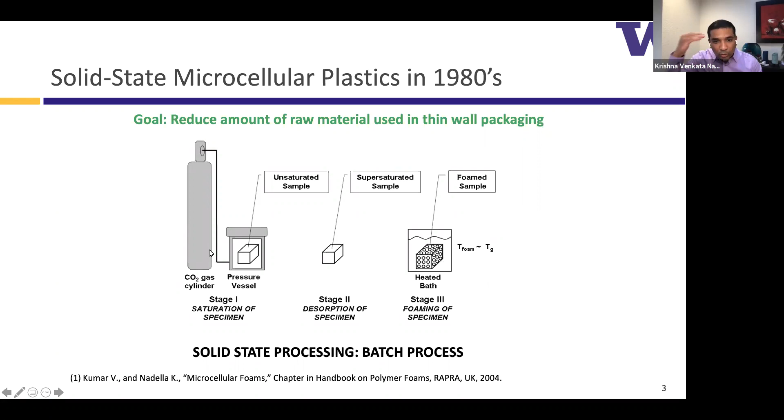We'll go through this again, what is important in this step. In the 1990s, when the consortium started in the mechanical engineering department, over 3-4 years all the focus was on the specific plastic called polyethylene terephthalate, PET. All of you know it—it is the plastic used for carbonated beverage bottles.

Soft drinks like Coke and Pepsi are sold in PET, the same plastic used for water bottles. Because it's ubiquitously used and is the world's most recycled plastic, there's a lot of interest in reducing the weight per unit area, or the density, in PET. It turns out the other big problem with PET is that traditional techniques to make bubbles by liquid state processing don't work like they do in polystyrene.

So there was a real need to develop a new technique to make bubbles reliably in PET. With that focus, Professor Kumar invented a technology called the semi-continuous process, in which a roll of extruded PET is interwoven with a roll of paper towel. You have a layer of PET, a layer of paper towel, and this interleaved roll is placed in a pressure vessel and injected with CO2 gas.

The process is essentially similar: you get some CO2 gas in, somewhere between 1 to 7% by weight, then you remove the roll and unwind it through a heated liquid bath followed by a chilled bath. The paper towel is recollected so you can reuse it again and again.

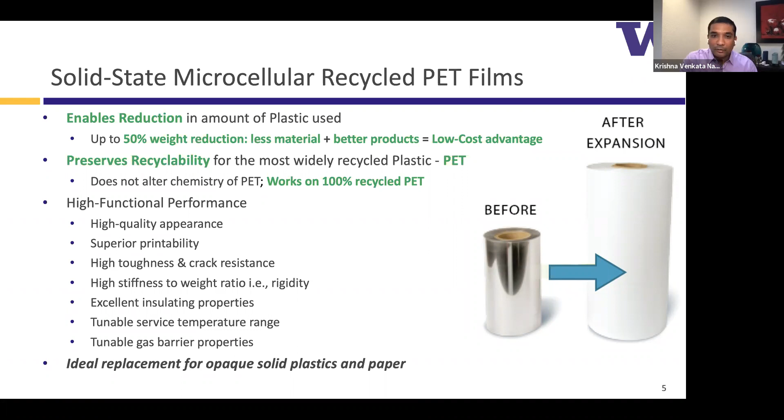Ideally, what we should be replacing is opaque solid plastics like high-impact polystyrene and paper, which, despite its image of being a very environmentally friendly material, in reality uses a lot of energy and releases a lot of greenhouse gases during its manufacture. So when you look at the key invisible attribute in this material, we have this optimized microstructure for individual applications.

So here is a good example of what a coffee cup looks like: a 25 micrometer skin followed by very small bubbles, followed by very large bubbles in the middle, and repeating the structure on the other side. This structure is optimized for insulation and stiffness.

So the density is reducing in a gradient manner through the thickness. And with any mechanics calculations, you will very quickly see this is what is optimized. Stiffness is achieved by gradient density reduction, unlike in an I-beam or other step change in density between the skin and the core.

The key visible attribute is it has a brilliant surface and very high-end aesthetics. People, when they touch the material, think it is either solid plastic or some very special design paper to give that kind of finish.

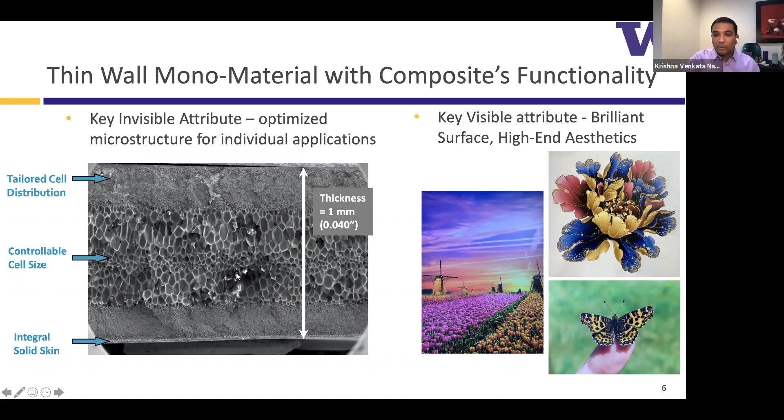So achieving this composite's functionality in a thin wall mono-material: the material started as a thin solid material, and we are creating these multiple layers on the inside without any lamination. All these layers are essentially integrated together just through the process technology. And another key attribute is this ability to manipulate the microstructure in thin walls.

In a 1 millimeter thickness, here it's optimized for a coffee cup. Here it's optimized for a paper industry application where we are trying to replace paper, processed in the paper making equipment, but the goal is to make sure that the surface has a matte finish and there is no reflection of light on the surface.

They're making the bubbles just enough so the surface is not flat, and then moving the small bubbles on the inside makes this feel like a specialty paper. People can't tell the difference.

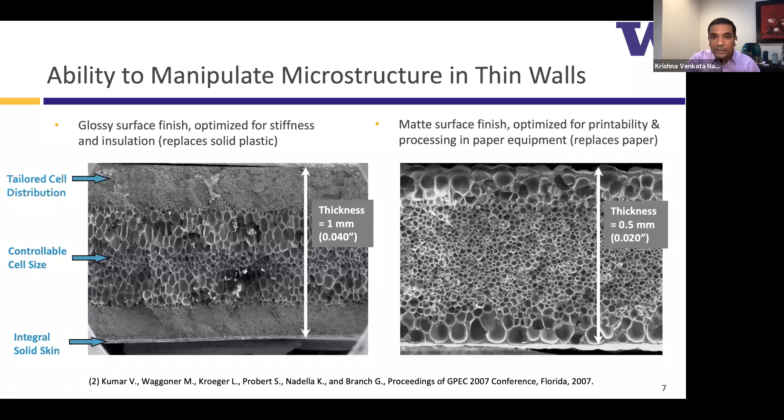So this is the key foundation that Professor Kumar had established while we were going out. The framework that we should all be remembering as advanced materials practitioners, going into this lesson and out to the world to commercialize, is this basic division: typically the primary innovation in an academic lab in advanced materials happens in the material composition.

And in order to achieve the material composition, there may be a brand new method, like in the case of Professor Kumar, or a modification of an existing method. So the process technology is not the key focus—it is just a vehicle to achieve the material composition.

Similarly, when you have a brand new method or modify an existing method to get to this new innovation in material composition, you may need a new design of equipment or modify the existing design of equipment. And sometimes, if we're lucky, new tooling designs are enough.

But all of this really gels together, or is distilled, only when we choose a proper end-use application for this material composition. And we also don't just choose the end-use application—for example, in this case, it's not just packaging.

The minimum viable product we had to choose was an airline coffee cup in the packaging industry. That's when all the lessons or all the efforts to get to this end application with that material composition will much more closely define what the process and equipment are. So it's very important to choose the right MVP in the right end-use application to make sure this happens.

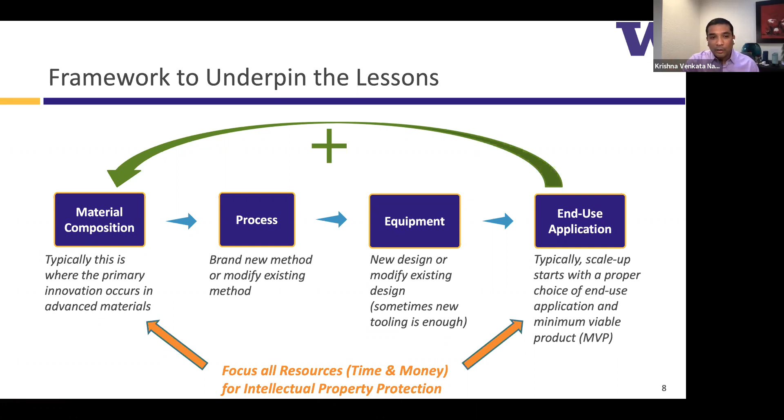My suggestion is that you should focus all your resources, time and money, for intellectual property protection on material composition and end-use applications, and ideally either teach away the process in journal papers or keep both the process and equipment as trade secrets. I think it'll save a lot of equity financing capital, and a lot of grief trying to get patents for process and equipment.

Microgreen Polymers is the first company I started right after my master's with a colleague who also got his master's from Professor Kumar's lab, Greg Branch. Both of us went into it, Greg was fully dedicated, spent many years trying to build it. We started out with an exclusive license from the University of Washington for all technologies out of Professor Kumar's lab, for all fields of use. We believed this was important, and so did the University of Washington, to support our work with investors.

I want to make this key point: this all-fields-of-use license may not be necessary. I'll show you the negative aspects of an all-encompassing exclusive license.

We then went out and got $1.5 million in state and federal grants from 2002 to 2014 to support R&D. We raised about $80 million in equity and debt, grew the team to 163 employees by the third quarter of 2014 because of growing product demand.

Essentially, our efforts led to commercializing the solid-state microcellular PET. We went through three iterations of technology development at a global 30,000-foot viewpoint, and won numerous industry awards for innovation and sustainability. Many applications and markets were attempted: printing substrates, a hot beverage coffee cup heat resistant to 120C, a dual ovenable tray heat resistant to 220C.

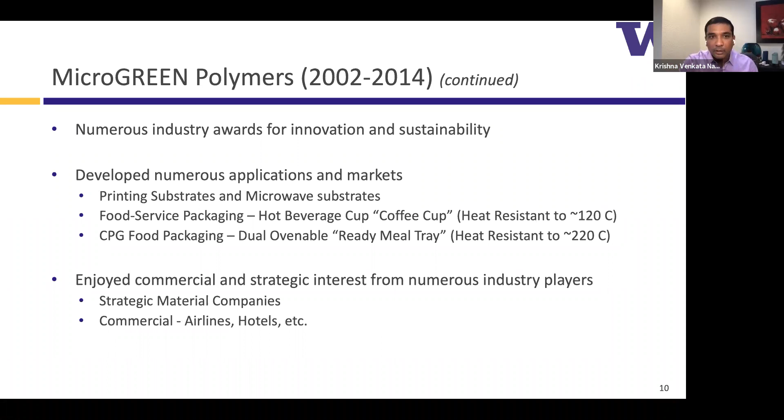Despite all this apparent success, Microgreen ended up being dissolved via foreclosure and auction process in 2014. A large industry player bought the company's assets for $2.5 million. Essentially the company failed due to two critical mistakes.

One mistake was underwriting significant capital investments with commercial deals that were not financially viable at the orders we had in hand. This is a key idea: you have a certain amount of orders in hand, so what is the size of the equipment you're putting in place? You have to be very careful about matching the size of your capital investments to the size of the orders you're getting, and the size of orders typically depends on the market adoption rate, which is not easy to figure out when you start your commercialization process.

The second big problem we had is we raised capital at the end from an investor whose investment goals were misaligned with the company's needs and risks. When you're growing that fast and investors want to support you, it's still very important to slow down and look at the alignment between what the investors' goals are for their money and what your company can actually deliver, with the attendant risk.

No one assumes that you will fail, but what happens if you slow down? What happens if a problem you didn't anticipate comes up? Will the investors' investment goals still be met? We essentially made an error there, choosing to accept investment from someone whose goals were misaligned with us. So that happened, and Microgreen closed in 2014.

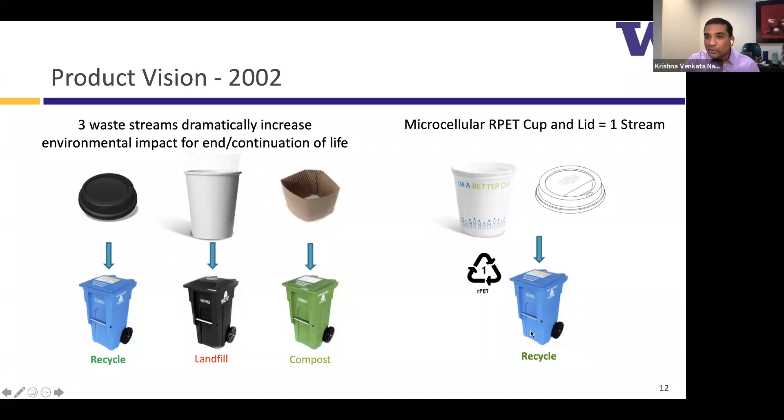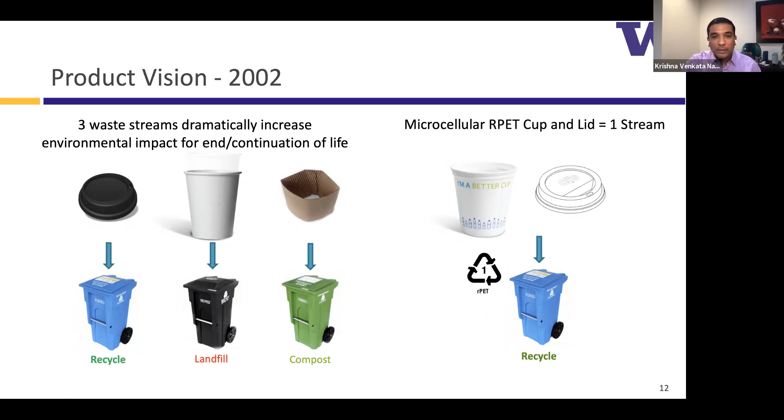But you have these 3 choices. Our vision was, how about a cup and a lid that just goes into the recycling bin? The cup is made from recycled PET. A very simple vision to explain the benefits of the technology without going deeply into the science: make insulating coffee cups from recycled water bottles. That was essentially the tagline, which enabled us to raise support from investors.

This is a great graphic from Professor Kumar that I borrowed, showing recycled PET with added CO2 to get these coffee cups. Alaska Airlines was our first customer in 2012.

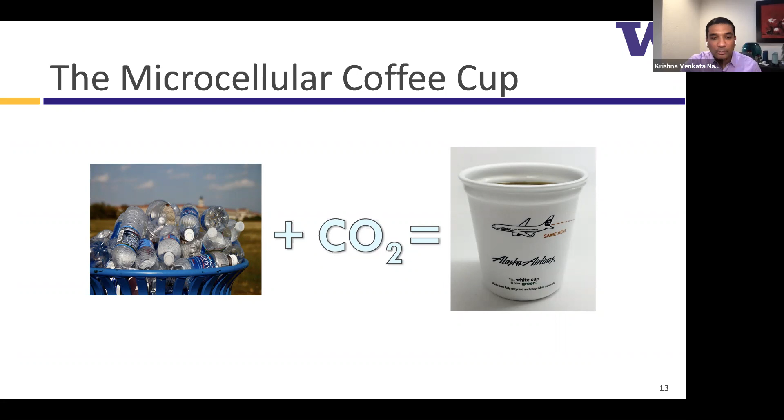So now let's jump in deeper into the actual process technology, what was going on.

So the pilot process that we scaled up has this interleaved roll, and we put it in a pressure vessel. Very quickly we found out that you can't use water baths to foam anything in the industrial world. Because it was a new manufacturing process needing a new equipment design, we went into this iterative equipment design. We eventually found this paper industry standard machine called a flotation air oven, which works extremely well to make this material expand in volume.

A water bath and so on don't work very well. An infrared oven, used in the plastics industry, doesn't work well either. We can go deeper into why at a later time.

So at the end of 2010, we were doing all this work in Green Bay, Wisconsin on borrowed equipment, rented equipment, and so on. There was a key question of which downstream converting process we would use in order to go make these coffee cups.

So the first commercial process, where we set up a production line in Arlington, was essentially using the same thing. What we did is at the end of a flotation air oven, we put a paper industry standard machine called a sheeting machine. All it does is take rolls of material and sheet it to make sheets of material, 28 inch by 40, 4 foot by 8 foot sheets of 1 millimeter thick material, if you will. So we had to couple these things together for various technical reasons. Standard machines from the paper industry were coupled together in a process technology.

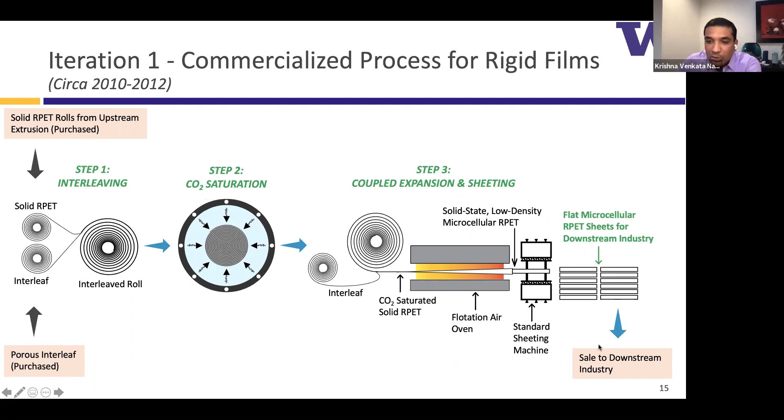So why were we making flat microcellular PET sheets? Because with this, the goal was to sell to downstream industry, right? Roll interleaving, roll saturation, coupled roll expansion and sheeting. This coupled operation of standard machines is a modified process method. Why were we doing it? Because then we could sell the material into the paper industry that currently sells paper rolls.

And the downstream converters typically print and cut a blank of material in the shape of a fan, wrap it around a mandrel, then punch out a bottom, and put the bottom at the bottom of this truncated cone to make a paper cup. That's why. So we attempted to do that.

And here is one R&D example of a microcellular PET cup. It looks beautiful, but at the bottom we had some real challenges. These challenges needed us to modify standard downstream convolute forming machines.

The challenge is we could not go down this route because there was no clear pathway to making the material heat resistant for a coffee cup. Again, our product vision was built around a coffee cup, and hence we could not use this technique of making cups to go after a coffee cup, right? Or at least the success was not guaranteed.

If it was an ice cream cup, this would have been a good choice to go make modifications on convolute forming machines. But by choosing a coffee cup, we kind of limited ourselves to not being able to use convolute machines. Then the second iteration of the commercialized process started, where we said, okay, we can't use that.

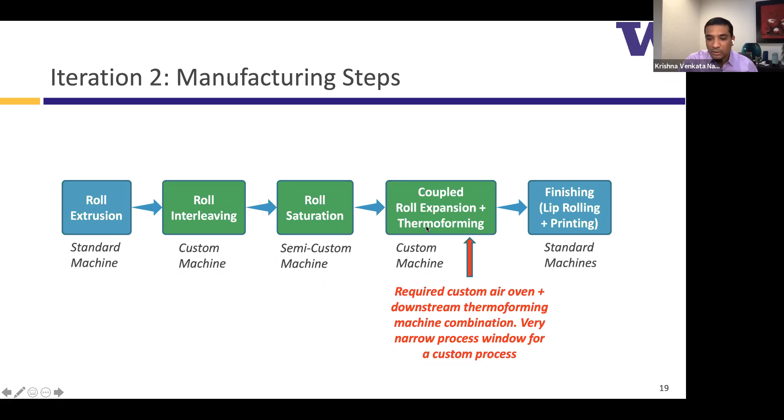But the product worked. There was a clear pathway to make heat resistant material. We achieved heat resistant coffee cups, and the coffee cups were not 50% weight reduced as we expected - they were 41% reduced, but 2 times more insulating than a paper cup. So that part of it worked well.

And essentially, we were able to launch this InCycle airline coffee cup into the industry. A bunch of large airline customers adopted it, and we had a 1 million cups per day production rate by the end of 2014. And this line here, just remember, is 60 inches wide.

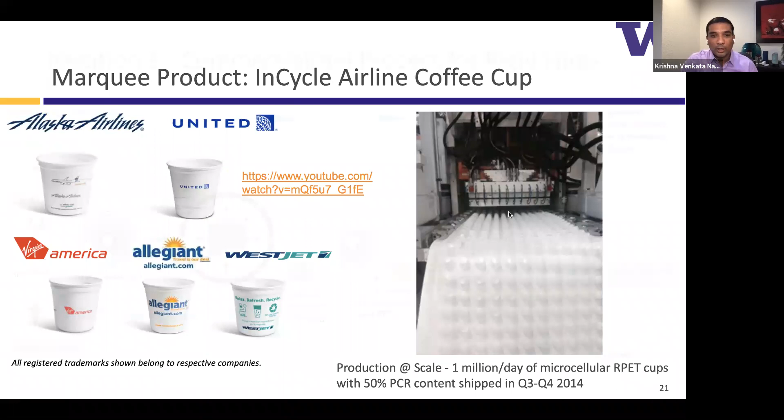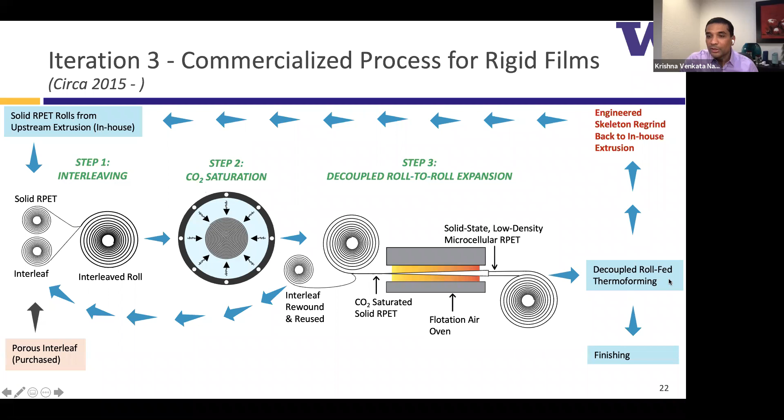Now in iteration 3, by early 2015, MicroGREEN had developed a more standard operating procedure where we would go from a roll to a roll of machines, and then straight to standard thermoforming machines without any customization. That happened in early 2015.

So what you will see in these lessons, I will try to derive them, is to commercialize successfully as a lean startup, per Eric Ries, you typically listen to this about value hypothesis and growth hypothesis. In value hypothesis, you're trying to prove that your innovation and product is valuable to potential customers. So the innovation, the material composition, and the end use application together have to be valuable to potential customers.

Typically it's easy to meet this, because when you get federal grants for your R&D and so on, there's a lot of peer review and merit review processes that give you an inkling that this is in fact valuable. So it's relatively easy to meet the value hypothesis question for academic researchers in advanced materials.

The real challenge is growth hypothesis. In the growth hypothesis, you're essentially trying to tell people, okay, I make this product, it is valuable to customers, but how will every new customer discover this product and innovation? And that is where the money is in the growth hypothesis.

What you'll very quickly find is, in order to go from the value to the growth hypothesis in advanced materials, you have to scale up the innovation to build that minimum viable product. And the real challenge is to build it with investment sufficient to get to minimum viable revenue capacity, which means you can't just say, we will build it, they will come.

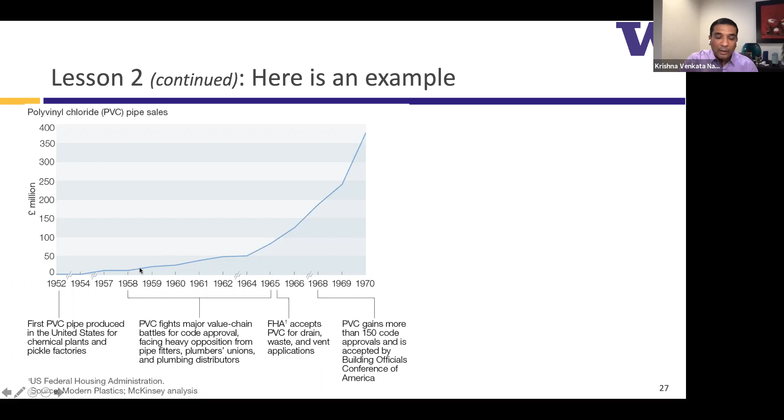So from 1952, if this was 2010 at Microgreen, that's almost 20 years later—somewhere around 2030 to 2032 is when we would be gaining this kind of revenue for the commercialization effort, if Microgreen were still alive. But right now our effort had broken down and we had to restart it, so we're drawing a new curve, if you will. It took 15 years to reach reasonable volume.

The third lesson, and this is a key lesson that I would repeat again and again, is to focus on the primary innovation. The primary innovation in this case was making bubbles in PET. It was enough to simply sell that primary innovation, because a lot of people would buy it.

What we got enamored with was our own end-use application idea of the coffee cup. Once we merged the coffee cup idea with the primary innovation of microcellular PET, there were all these secondary and tertiary innovations—new processes, new machines, new tooling—and it immediately diluted the focus and started to really get in the way of execution, both at a sales level and at a manufacturing level.

So again, these secondary and tertiary innovations depend on what end-use application you're choosing. But I would relentlessly focus on the primary innovation, because just selling one differentiating factor that really is groundbreaking in a given industry is hard enough. Trying to layer another innovation on top of it very quickly dilutes the amount of money, energy, and time you have to achieve progress.

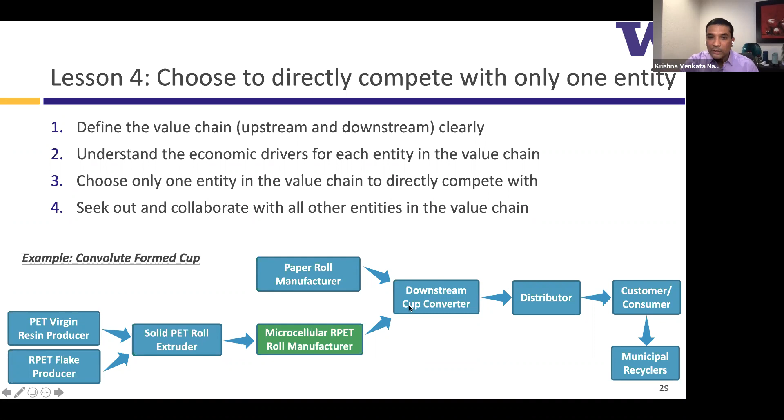The fifth lesson is to choose the right product format. Almost always in every industry you're trying to commercialize in, there is a standard format in which the material is sold in the value chain of the end application. Is it a roll? Is it a sheet? Are they powders, bars, rods? What is that standard format?

And what is the smallest dimension of the standard format that someone is making money and making a living and building a company on? So at Microgreen, when we chose to couple the machines together, we went away from a roll to a web. Basically, the input was a roll, but the output was not a roll. It was a finished shape, right? This choice is unusual in the industry. Some people do it, but it's not usual. You immediately took us away from a standard format of a roll.

And then by choosing a 60-inch wide, 1500 millimeter machine, whereas the most smallest standard dimension machine is a 600 millimeter, 90% of the world market uses somewhere close to this metric. And these machines are less than $500,000 each. By going to an American size of 1500 millimeter with inline coupling, the investment very quickly went up to about $5 million. So if you were to just choose the standard dimension machine in the standard format for your industry, you'll save yourself a lot of grief by not over investing in capacity.

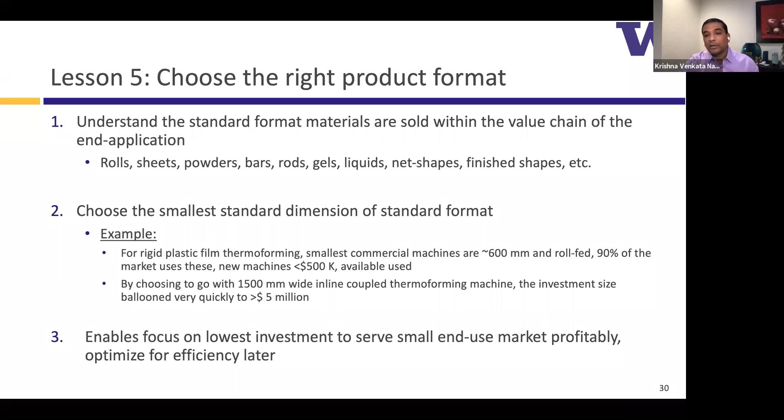It also enables you to serve small end use markets profitably. The lure of large end use markets is the wrong approach to go for an advanced materials company initially. Going after a very large application just because you need $1 billion total addressable market to attract a venture capitalist is the wrong way to go about doing it.

The sixth lesson I have is to choose the right geography. The geography we live in and work in may not be the right one for the initial commercialization. It is best to choose a geography where the downstream players, people who would buy stuff from you, are already seeking the innovation from you. For example, in our case, PET foam was already of great interest to downstream players in all major European countries. In America, no one cared.

So it is better to choose a high GDP per capita economy in the EU with a small population, because then what happens is the size of the investment per iteration is smaller. The size of the overall financial and reputational risk is much smaller. And most importantly, the number of naysayers who tell you, you will constantly fail, they're just fewer because of geographic fragmentation.

I would also consider locating your operations in a low-cost geography to reduce both the risk and cost per iteration, especially geographies where your innovation is too early, because people won't care about stealing the innovation from you and doing something. So if I were to locate, say, early on in Morocco, for example, and went after the European market, I think you get the benefit of a very high price point in sales and a very low cost geography where people in Morocco are not caring about copying your innovation, because it's too early for that market.

The sixth lesson I have, and this is mainly for the academic audience here, is to choose partners with the right business model. Typically, many advanced materials technologies are innovative platforms. They have multiple applications in multiple industries. So it is important to choose a licensee or a commercialization partner to license to that focuses on one field of use.

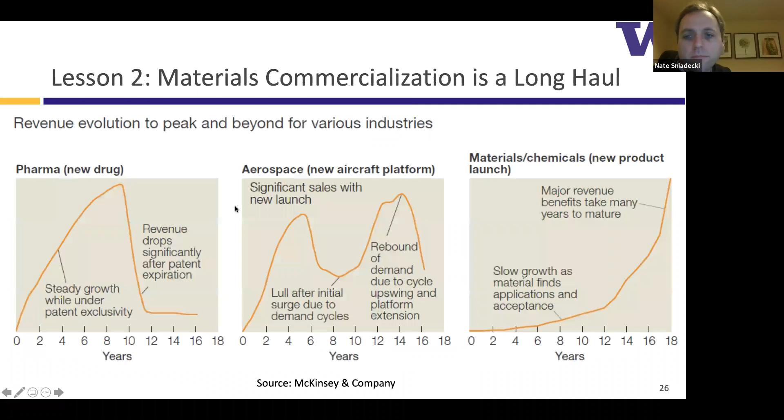Just to kick things off, I got two questions. One's a mechanics question, and the other one's an entrepreneur question for you. Which one would you like? Mechanics first, see if I remember some.

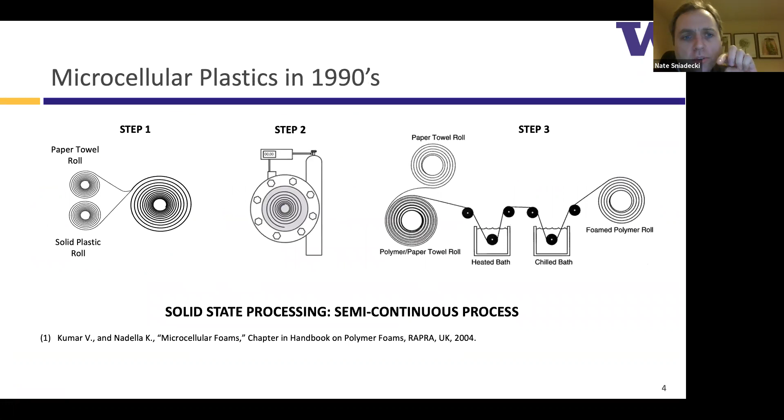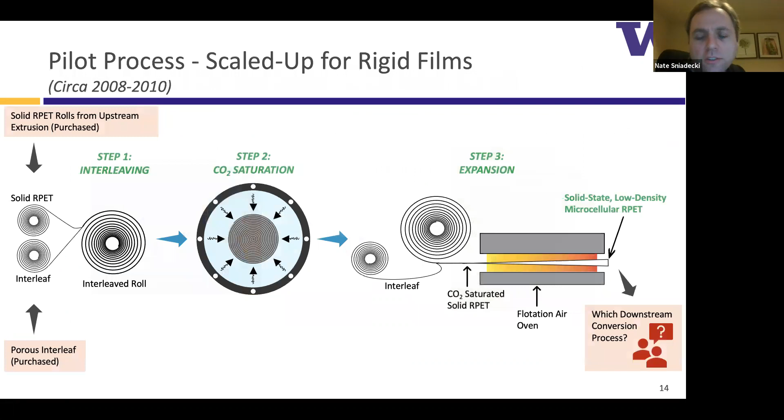It was really interesting, the transition you talked about from the slabs to the thermoformed cups. You talked about how the 50% reduction dropped to like 40% in the thermoforming. I was curious, could some of that be from how this material or process handles when it gets thermally formed? Are the corners kind of condensed back again a little bit, with loss of the microcellular structure?

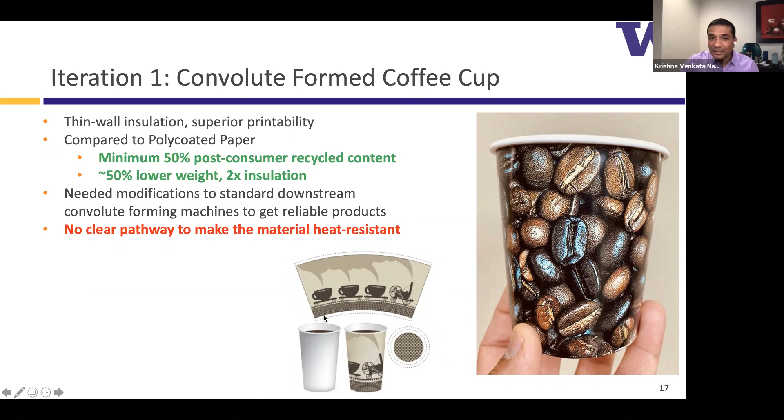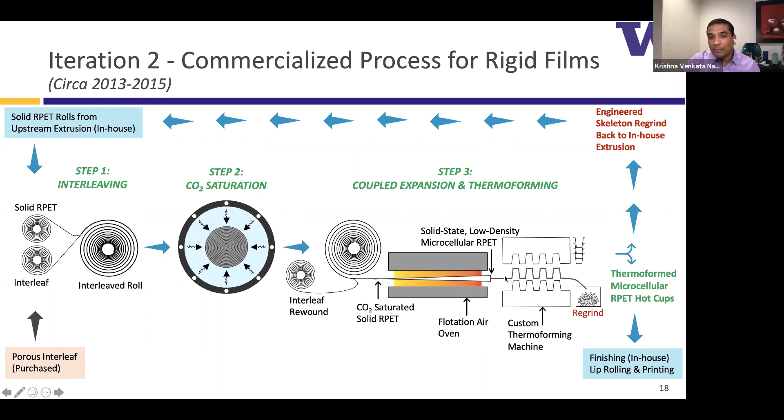Yeah, so what happens, Nate, is that in this kind of forming technique, the wall thickness from top to bottom is exactly the same because there is no stretching due to tension. Whereas in thermoforming, you have to start with a process where the material is, say, 1.8 millimeters thick at this point in order to achieve 0.5 millimeter thick at the bottom of the cup. And that's basically the challenge. So as a result, the cup is completely over-designed at the top, way too thick, in order to get to the right thickness at the bottom. That's the difference on why you don't see all the reduction in weight.

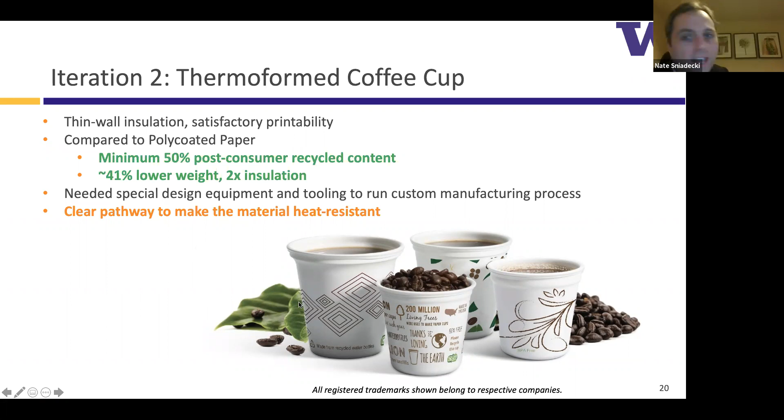Along that same idea, I know you talked a little bit about choosing the right moment, getting the right partners, and things don't always go as intended, sometimes there are hiccups along the way. I was curious if you could reflect on this idea of spinning out, but whether there should be better ways of spinning back in to regroup. This process of entrepreneurship seems almost a one-way door where the technologies and ideas leave, but the university could have a symbiotic relationship where there is some coming back into the fold to get stronger.

So what I found is, and this is where Professor Kumar and my combination has really worked well, is that in the companies I formed and run, we have absolutely no problem discussing every idea we have with the students and Professor Kumar in the lab, because the tension is not that I want to own all the improvement IP and reduce the amount of payments to the university. Our goal is to get the best solution and keep the payments to the university going on way into the future. So actually building that graduate student and professor relationship, and graduate students spinning out, there is an ability to do this.

What I typically found is when very large companies just come take a license, they want to take the license and just completely go quiet.